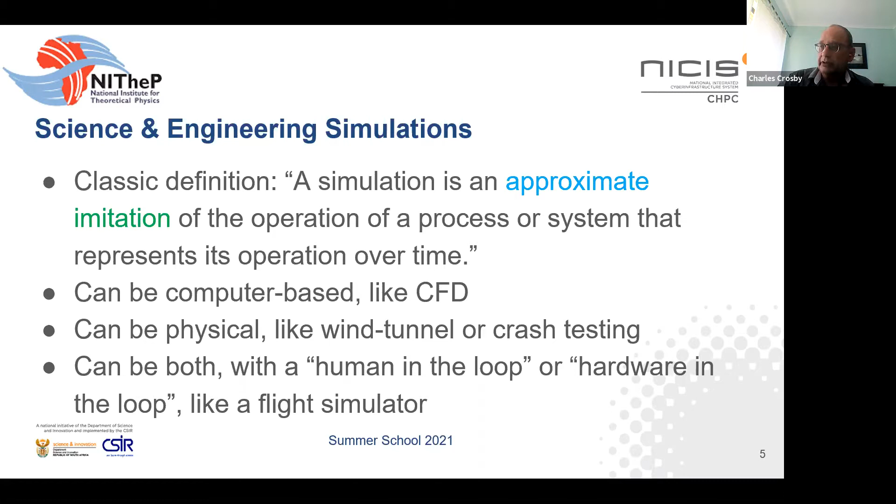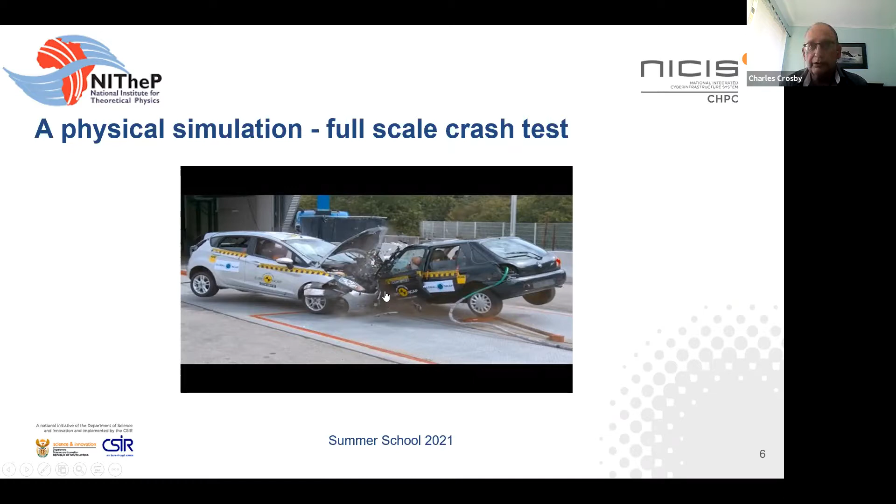To get into one of my favorite kinds of testing, this is a full-scale simulation, full-scale crash testing. As usual, it's a YouTube video, it'll take a moment to load. Well, hopefully it will load. It's quite entertaining to spend some time looking at crash tests on YouTube.

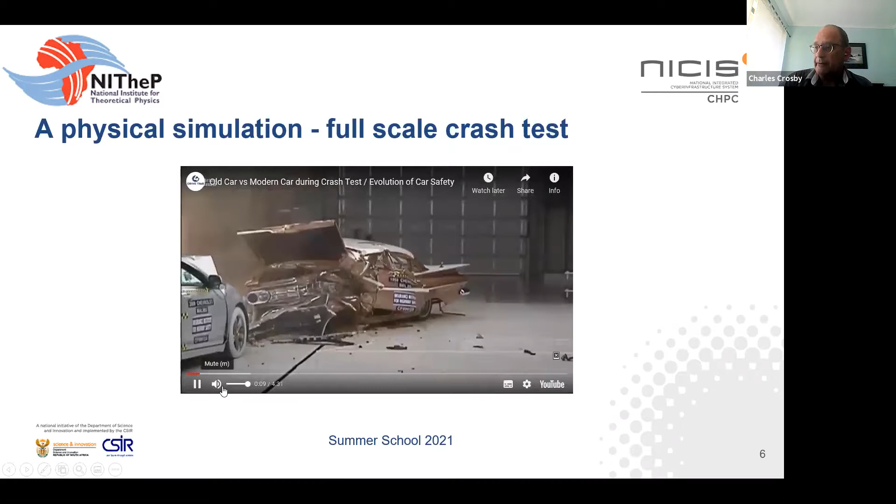If there's something that will teach you to drive carefully, it will be crash testing, because very often these crashes are... if there's something that will draw your attention to road safety, it's crash testing, because these tests are carried out at very low speed, something like 40 kilometers an hour. You almost never drive as slowly as that, but it's spectacular to see how much damage you get.

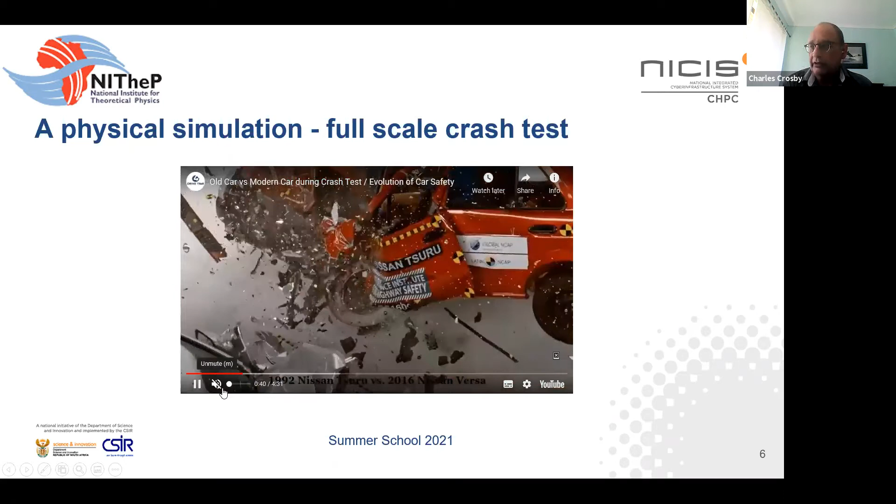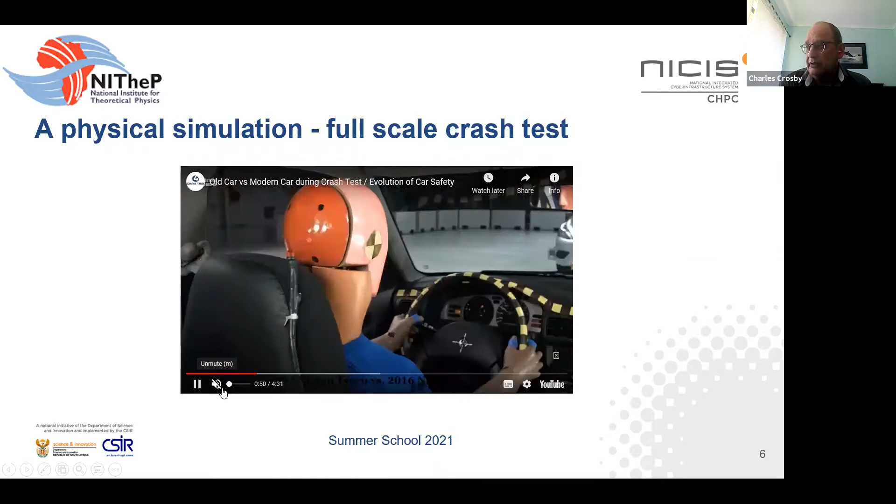Your immediate reaction may be, but this is a real test, they're testing real cars, why are we calling it a simulation? It's a simulation because it's happening in a laboratory under artificial conditions. You're not going to drive in real life at 40 kilometers an hour head on into another car, you're going to have some kind of other accident. But the technologies that help keep cars safe in these kinds of accidents will hopefully help keep cars safe in other accidents, so that's why it becomes a relevant simulation.

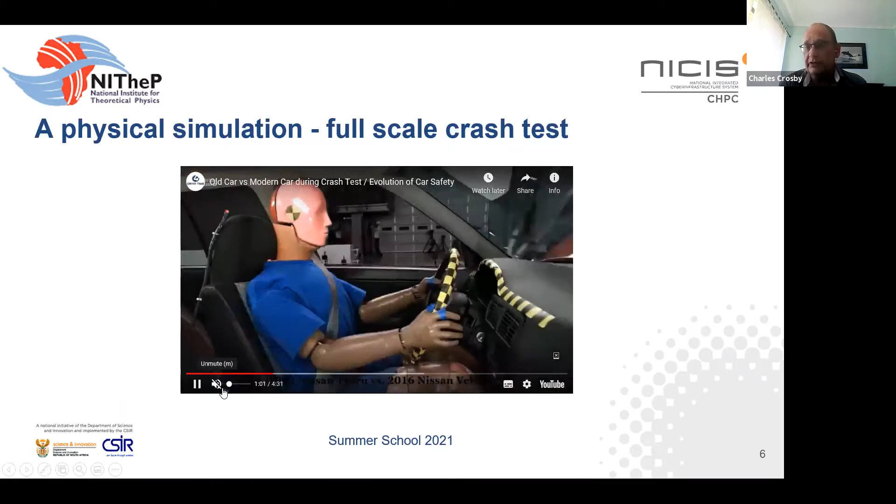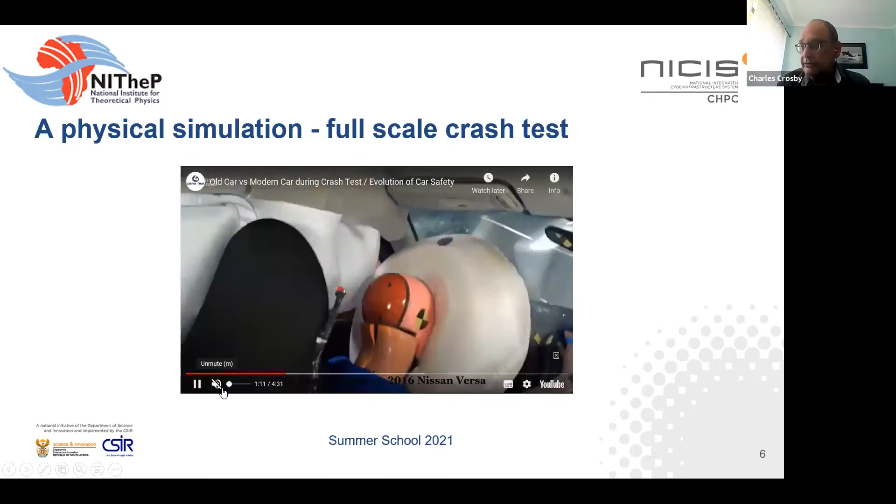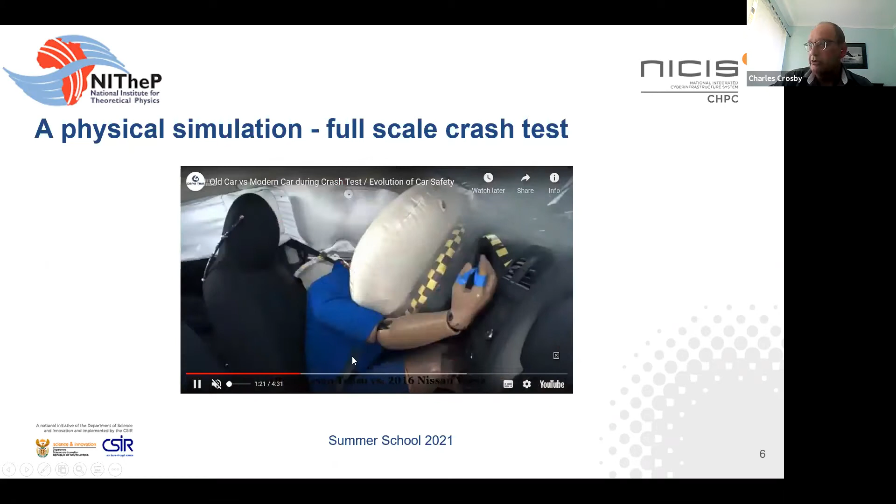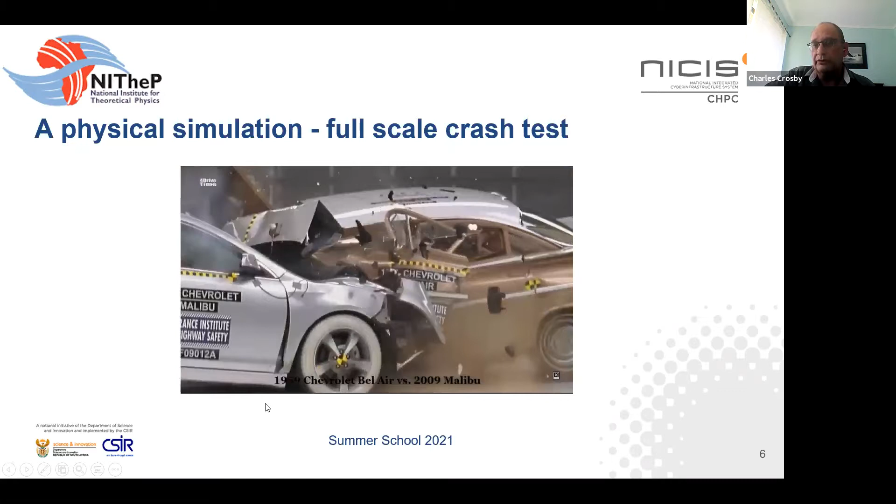It's also a relevant simulation because of the passengers. We haven't quite got around to using prisoners as crash test victims, so we use artificial people as crash test victims, so we can measure what happens to them. And believe me, if you've ever been in a really big car accident, you'll be very grateful for all the work that goes into modern cars. The difference between old cars and modern cars is dramatic, and this is largely due to the simulation involved in developing better and safer cars, ones you're less likely to get injured in. You can spend a lot of time watching this, especially how badly old cars react to accidents, but we'll stop it there.

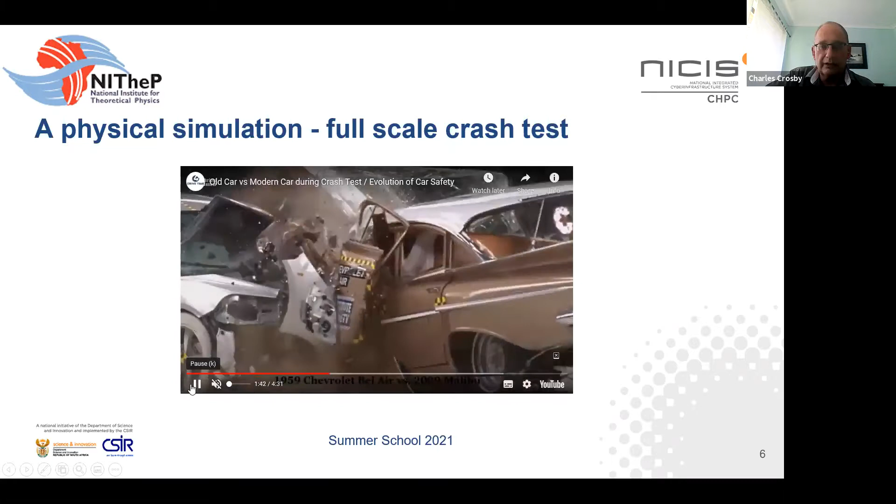Closer to my field of expertise is wind tunnel testing. Now, a normal wind tunnel test is a spectacularly unspectacular event. You've got a model firmly mounted in a wind tunnel, and it doesn't do very much, and the wind blows over it and you measure the forces.

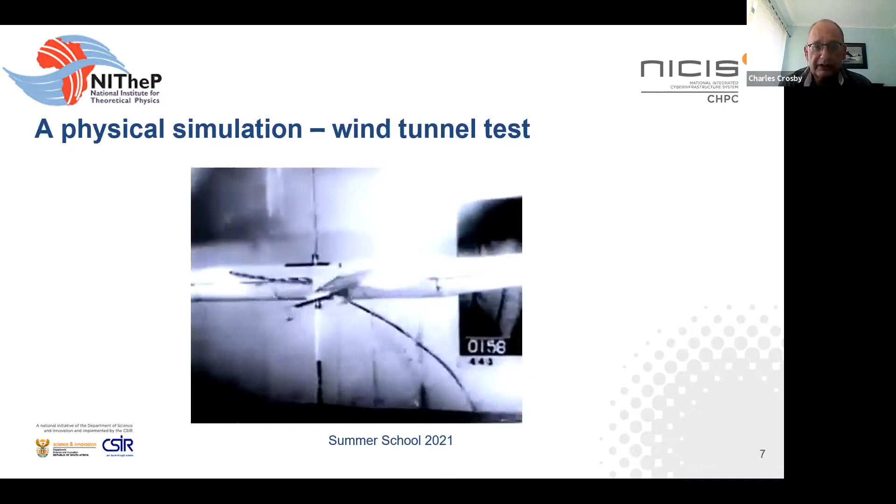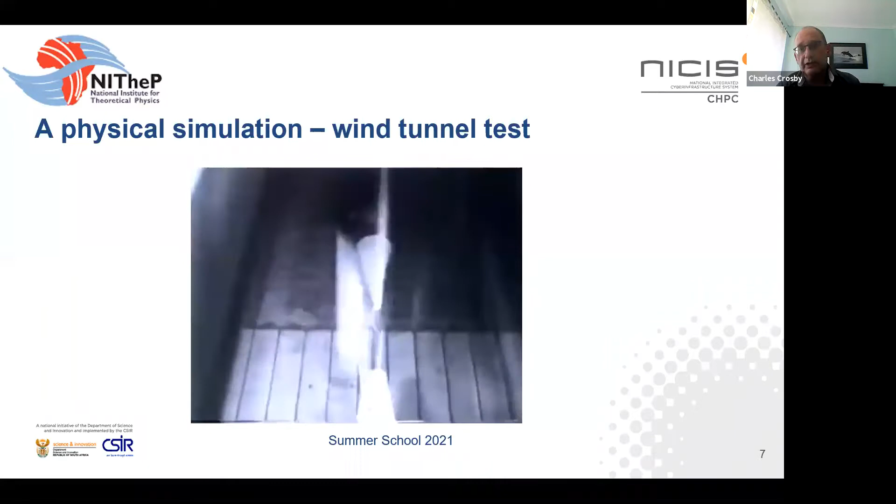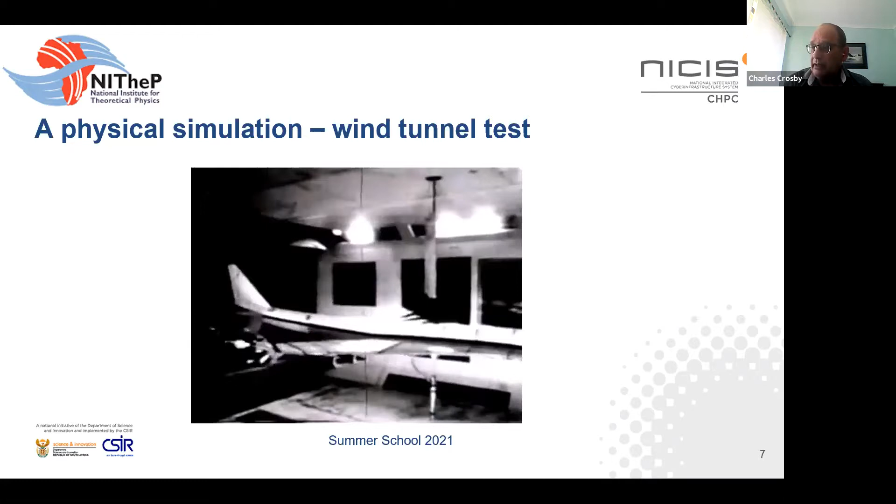Flutter testing does exactly what you don't want wind tunnels to do, which is destroy the model. If this happens in a normal wind tunnel test, you'd be very upset because you really don't want things flying around at 100 meters per second in a confined space. But dynamic testing, such as flutter testing and spin testing and a few other forms, is very valuable in the aerospace industry. Once again, it's important to understand this is a simulation, not the real thing. So when somebody tells you that your numerical simulation results must match the real world, and points you toward an experiment, like a wind tunnel test, that's not the real world either. That's also a simulation, just a different type of simulation.

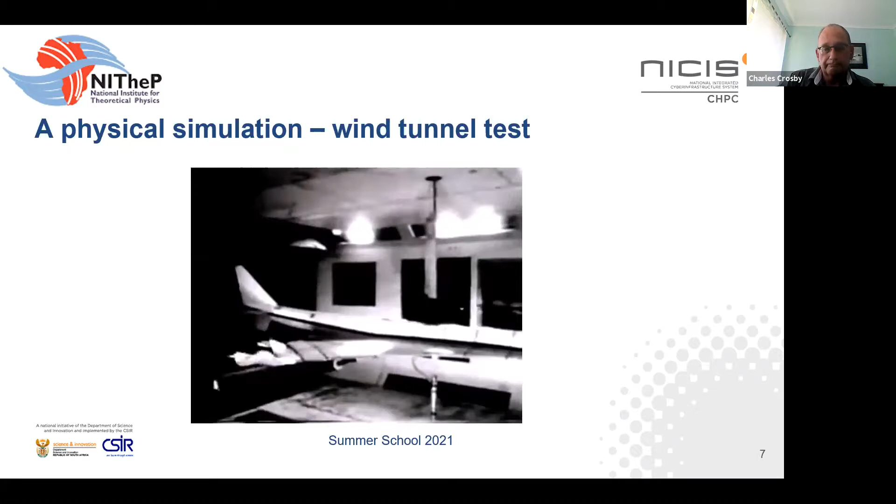Right, hardware in the loop simulation. This is less well known amongst lay people, but if you've ever been involved in the industry, you realize just how incredibly important this is. Before you actually take something out into the field, for example, to take it flying, you want to test it to the best extent that you possibly can.

In a lot of the testing that I've seen, it was actually done with the real hardware. In other words, the control fins on the real hardware had to move as predicted according to the simulation program. So you had all the real hardware involved in this test. The only thing that wasn't quite happening is it wasn't actually flying - it was standing statically on a bench. But this is a critical step, because this is where you eliminate the failures that you would get if you were actually flying it.

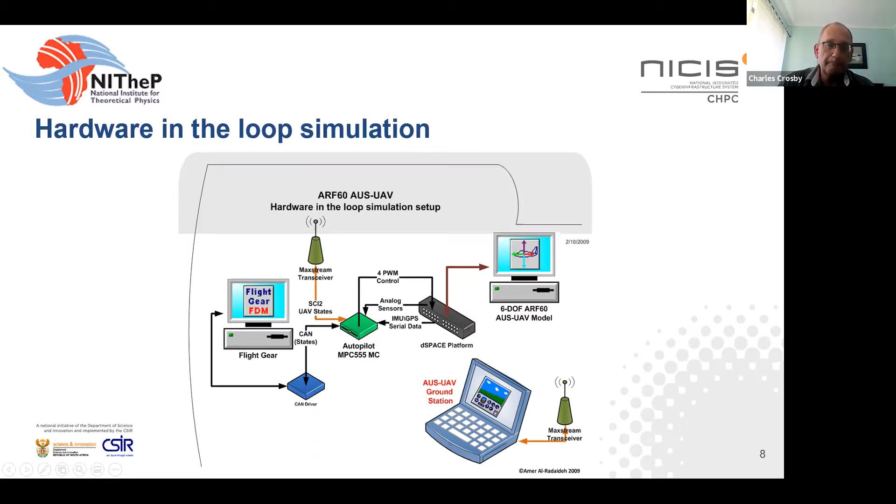Charles, we have a question from the chat now. He wants to know which type of simulation is more reliable, computer or wind tunnel, or lab testing in general, I guess.

So this becomes almost a religious debate, and it rather depends on which angle you come from and which generation of person you are - whether you've grown up with the experimental testing or with the computational testing. In practice, it turns out that it's not a valid question. You don't do things that way. You use both.

So you end up using both of these together, and it comes down to the individuals involved and how you work together, because you gain the value from this technology by using the things together - not by using them in competition to each other. You might choose to do less experimental testing at some stage because you've got better numerical results, so you might skip a complete step. You might choose not to generate a full matrix of output information with a CFD because it's slow - it takes a lot of computing time.

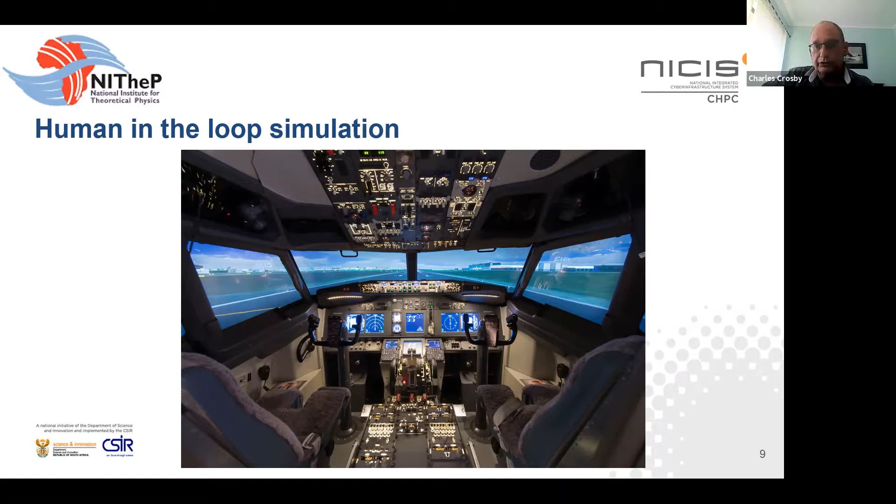Combination of human and hardware. We talked a little about this on the previous slide, but it's also a useful example. Those of you who follow open wheel racing cars will know there was a time when drivers died regularly, and mercifully that doesn't happen anymore. They've made the cars safer and safer until one of the few dangers left was being hit by foreign objects thrown up, for example, by another car having an accident. So that's why you now have structures protecting the driver of these cars, and these structures are getting better, now adding things like a very thick windscreen that'll even stop small debris.

But it's a valid question: how easy is it for somebody to actually drive the car like this? Can they drive it and still see the track under all conditions as well as they need to? So you do this with a simulator. You've got a simulator that does everything the car does, more or less, except go around a track. You stick the driver in, make the modifications, and prove that under different lighting conditions you've got the vision you need.

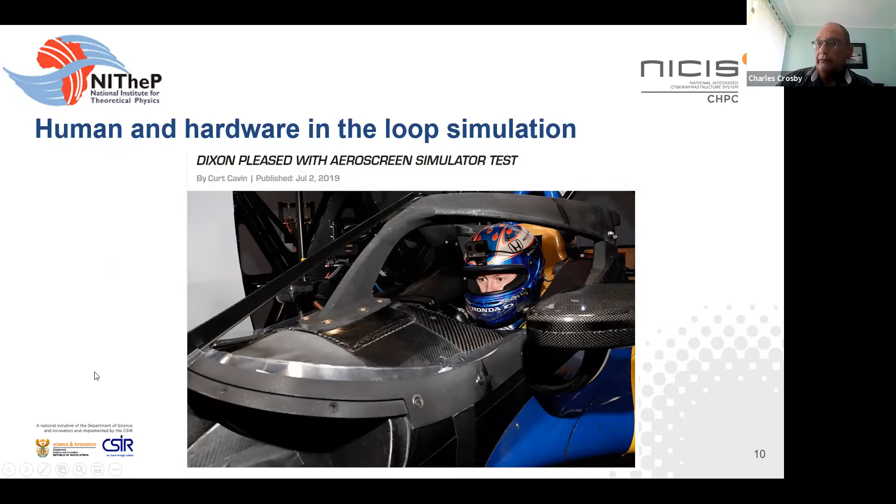If you're working on the basis that what you're trying to get is understanding, the more simulation you do, the better you understand what you're dealing with.

All simulations need appropriate quality control. In CFD, I'm not going to talk too much about quality control in CFD - you can get that from your textbooks. But there are standard methods to ensure that your CFD results are as reliable as they can realistically be.

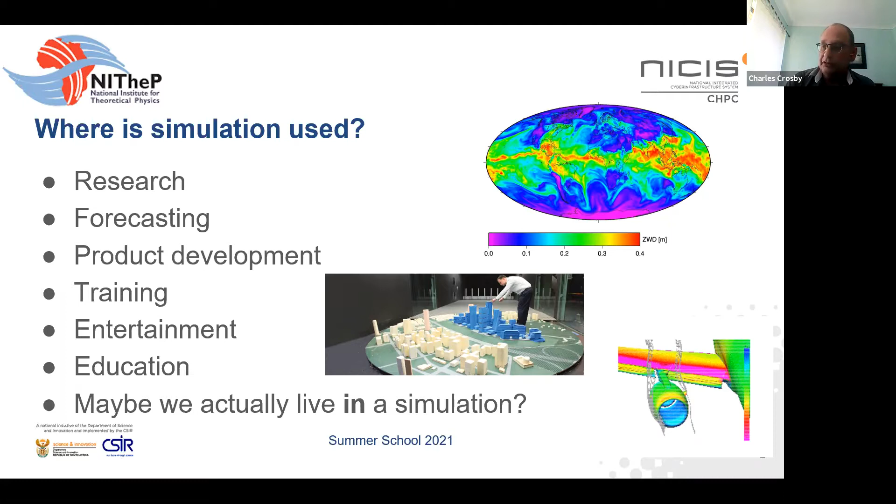Product development turns out to be much, much more difficult and much more expensive than people realize. The reason is that you've got an exponential growth in expenditure during the lifetime of a product development. I had this explained to me at a conference once in a very simplified form, which I think is a simulation of reality - a way of looking at reality without being overwhelmingly complex, but hopefully providing some kind of insights. It's got to do with the fact that as you get further along the process, your costs go up very dramatically, literally exponentially. People use the expression exponentially normally incorrectly - when you start using it correctly, it gets very frightening.

It's quite easy, if you've got a bright idea, to develop a proof of concept prototype - in other words, you've got some clever idea of doing something. My last job before I joined the CHPC was working on equipment to treat ballast water on ships, to prevent them from spreading invasive organisms all over the world. Somebody had a bright idea, built some equipment, and tested it on real life organisms, showing that after treatment those organisms weren't alive anymore. And it was done quite cheaply - it cost a couple of thousand dollars to prove that the idea worked.

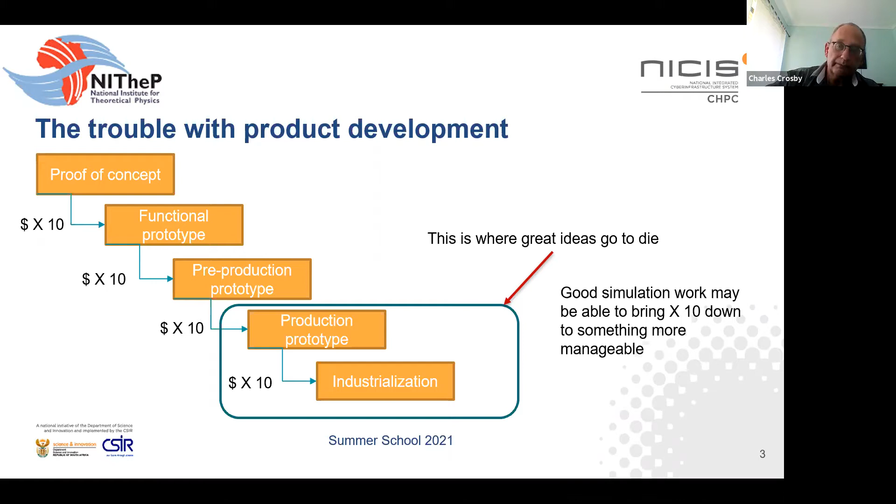Charles, there's a question from Rockefeller. Shoot. Okay, he says this is more of a broad question: how is bias handled when doing simulation, for instance, on product development? I'm not quite sure what he means by that. Maybe he'd better explain to us what kind of bias he's talking about.

Okay, maybe I'll speak it myself. I'm trying to take, for instance, a case where we are testing a product. We are doing some simulation, and we end up neglecting or omitting some cases because we think this is not really important. Let's say, for instance, there are products we develop out there that, when going to production, become biased against women, for instance. That's one case - maybe because at a different phase of the product development, we didn't take into account such consideration because we thought maybe this is just going to work. Now I'm biased towards a certain class, or a certain event, or a certain scenario. That's what I mean by bias. And how do you handle that when doing your simulation? Because to avoid bias, it would be great to test every single case scenario, I believe.

I don't know - so yeah, testing every single case is also expensive. So this is actually, I think we can talk about this a little bit on this next slide, because it addresses some of that. You've got to start broad - I think this is what you're talking about. You want to start your simulation process broad; in other words, explore the design space, all the possible configurations. And you would typically like to do that with cheap techniques.

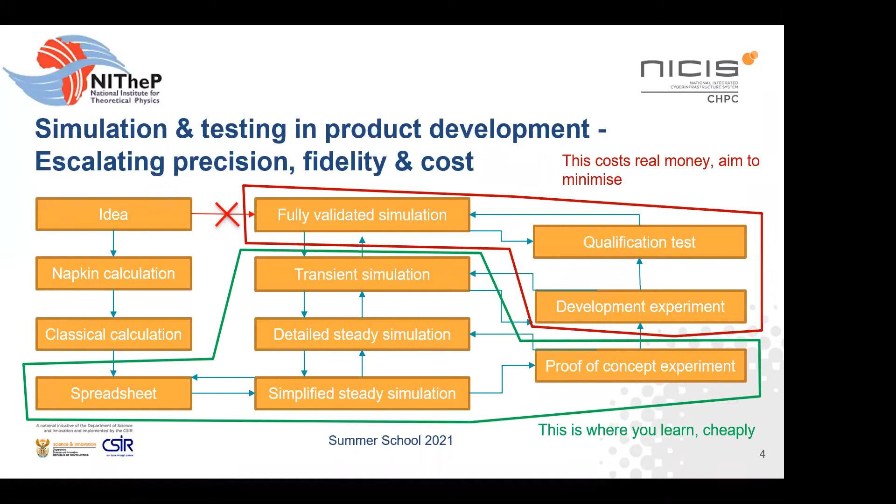Yes, the whole point was about how to narrow down the design space. So you start broad with your approximate techniques, and only experience can tell you the extent to which you can trust your design methods, your approximate methods. They're not going to give you precise numbers, but are they going to give you a correct ranking? Are they going to say product A is better than C, but worse than D, even if the actual numbers aren't quite right?

Very early on, in the company I was working for, when we were just starting to use CFD, we were faced with something like this. We really had to broaden the design space to find a configuration that was practical, because the configuration we had in mind, which could fit into the available space, could not deliver the performance. It was control authority on control surfaces of a flying vehicle. There was only so much space, and the concept the original designers had come up with wasn't working once they tested it.

And we used very, very rough techniques. I cannot believe we got away with testing such rough techniques, but we had to, because this is 20 years ago, so we had very weak desktop workstations and PCs for doing our CFD. There was no parallel processing available, and very little memory. So we made conscious decisions to use very coarse simulation techniques to try and narrow down that design space, knowing that much more detailed analysis and testing was going to come down the line. And it worked. It worked an absolute charm.

It's a very valuable technique, but you've got to understand what you're doing, that you're starting off broad and imprecise, and you're going to narrow it down to something much more precise. Okay, so this slide kind of illustrates that idea.

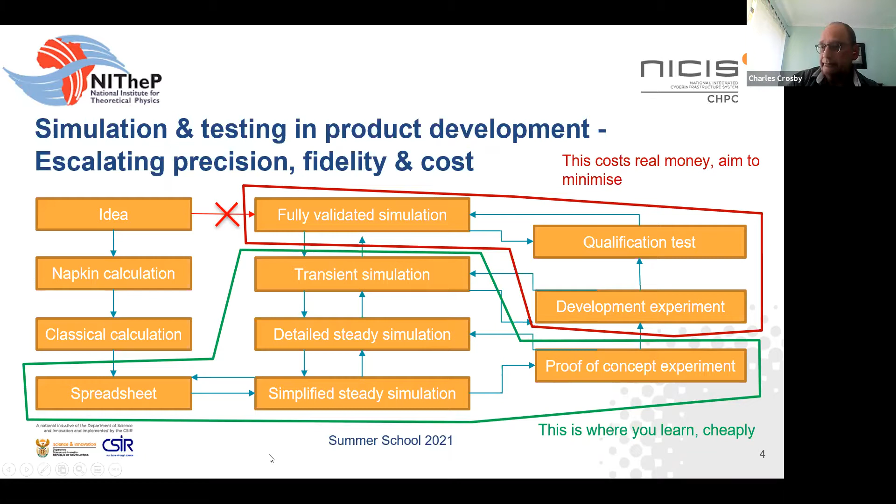A concept that's turned out to be increasingly useful but very, very difficult to implement is something we call simulation-led design. Here's what happens in an old-fashioned company: you've got a design and development team, you come up with a product, you think you've got it right.

You release it for testing. It fails the testing. Then you call in the simulation engineers and ask them why it's failing and how you can change it. Of course, these simulation engineers have been sitting twiddling their thumbs all along, looking on in horror as the design and development process proceeds.

The failure in testing comes as no great surprise, but then you get called in right at the end to try to fix it. I've been in this situation several times — it's immensely frustrating. So the concept of simulation-led design is: before you do any detailed work on the product, you start simulating.

It might be very simple simulations, but you start off with a simulation so that you bring it in at a much earlier stage of the process, right from the start, even before a lot of the other detailed work. The interesting thing is this may not be faster or cheaper, but it can get you a product that's much better, and it can minimize your chances of failure.

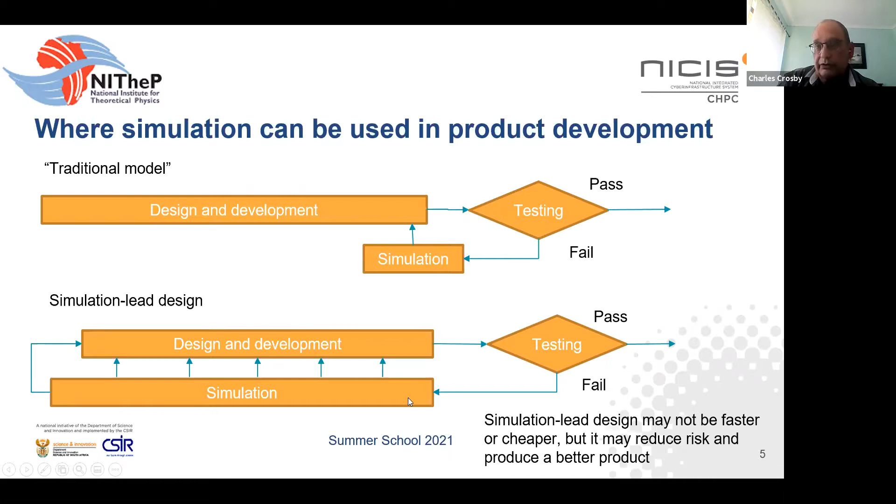It's very, very difficult to get an established company to change from the old approach to this one, because they've developed a certain way of doing it over many years, and for good reason they trust that method. It wasn't too difficult to persuade them to add something to help fix problems, but to change this whole philosophy around is very, very difficult — one of the challenges of this kind of environment today.

To summarize this little lecture: simulation is everywhere. It's used widely in more or less every field of human endeavor. Don't fall into the trap of thinking that everything is about simulation — it's not, there are lots of other things that go into it in anything you're dealing with — but simulation is increasingly important, and people realize this.

You cannot replace your experts who know whatever you're dealing with very well. It doesn't matter if you're designing cars, boats, airplanes, computers, or whatever. Your experts know what they're doing, and if they know what they're doing, they're keen to get additional insights. This is where you come in as a simulation person. You support the experts with good simulation results, and eventually you find they actually fight for you in the company because they realize how much better the simulations are making them look.

This previous slide that I showed, integrating the simulation with other processes, is tricky. It is really difficult, but if you're trying to get anywhere with simulation practice, it is absolutely crucial. Right, so hereby endeth this lesson.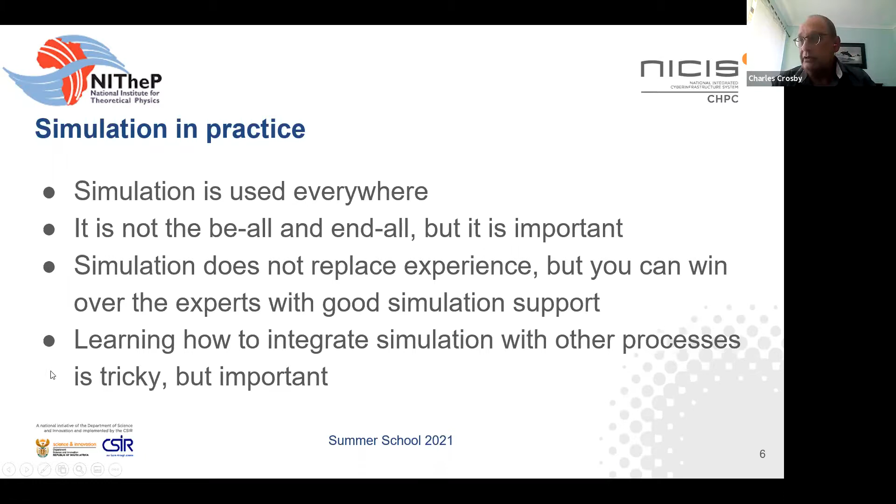Any comments, questions, please? Everybody asleep? Do you want to do a 5-minute comfort break?

So maybe I got a question. Yes, shoot. So logically, I tend to think that sometimes making assumptions about the model or the product you're developing can also help narrowing down the design space. I'd like to know whether from your experience you have encountered cases where making assumptions has revealed not to be a good thing to do.

Yes. You cannot get away from making those assumptions. You don't want to find yourself with an impossible design space. You've got to narrow things down. This is where experience comes in. There's another heuristic: you make all the big mistakes in the first 2 weeks of a new product. So for the next 10 years, you end up making all the small mistakes, but the big mistakes all happen in the first 2 weeks. So you have to question your assumptions at that point.

And this is where, if you've got a process whereby you can get simulation results quickly, early, even if they're not very precise simulations, then you've got a chance of minimizing your chances of making bad assumptions at that point. But of course, you can make really bad assumptions at this point, and it ruins the whole project. But the more you know, the more you can simulate, the more you can simulate quickly initially.

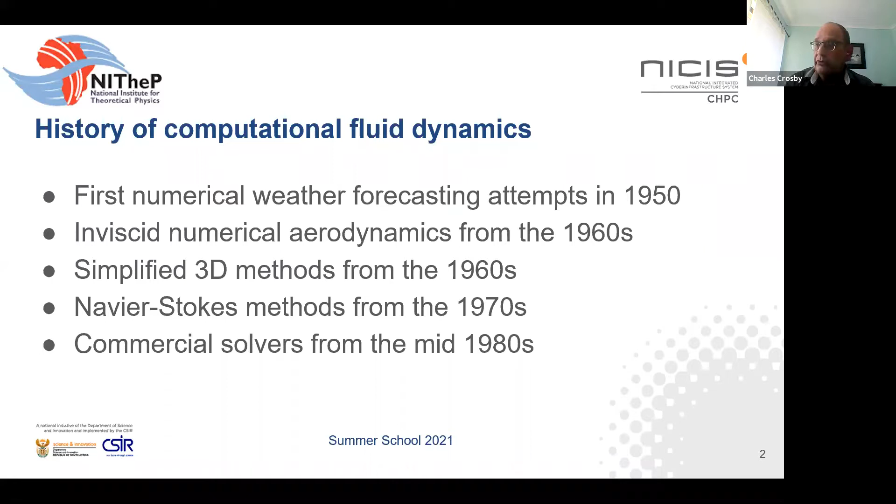That's a very short history of it. So I'm just going to run through different types of simulations.

This is quite a good illustration. We've got an identical situation, just a YouTube video that takes the usual time to load. These are identical simulations: uniform inlet flow, flowing past an obstacle, in this case a cylindrical obstacle.

You can either do it steady, which means you drop the time-dependent terms from the equations, or you can do a transient simulation, which means you take into account the unsteady effects.

And what you see is something completely different. Superficially on the upwind side things look more or less the same, but in practice you get this oscillating flow. This is something that should be familiar to everybody.

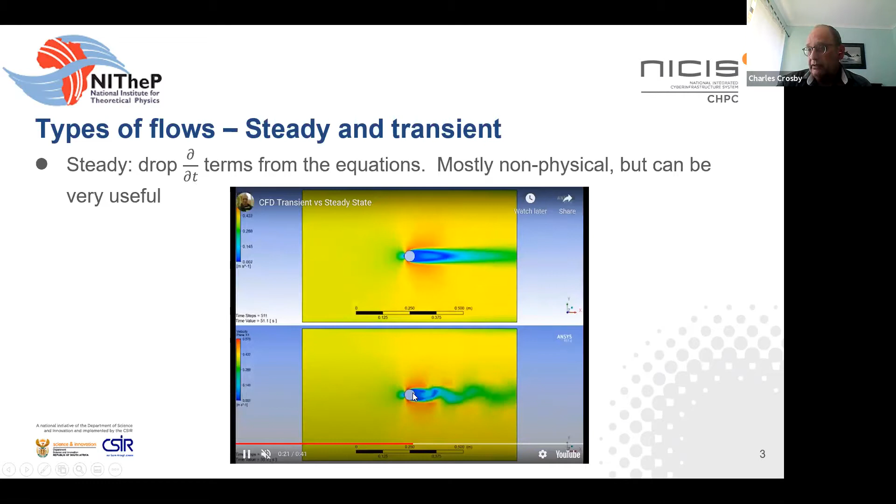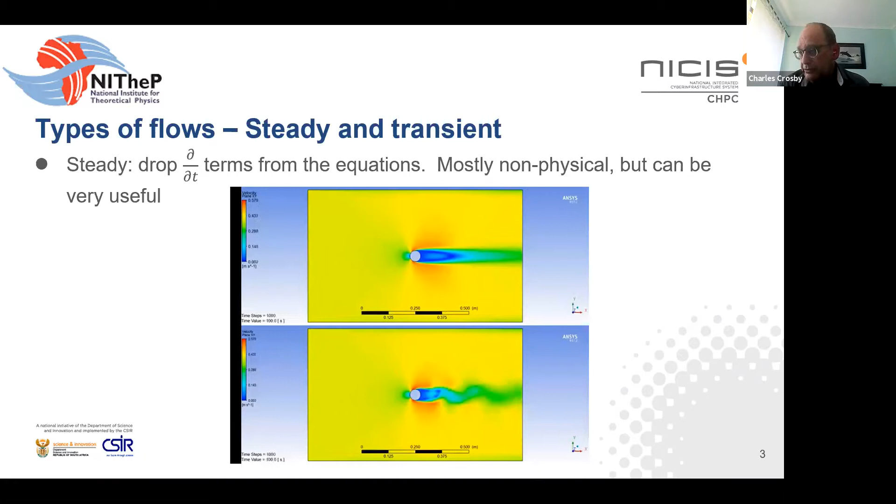You get this more or less anytime you stick a cylindrical object in flow. You get a humming noise, a vibration. Industrial chimneys have helical protrusions fitted around them to break up those vortices in 3 dimensions. A lot of radio aerials on cars have a piece of wire sticking out from the roof with a spiral wound thread or something around it, which does the same thing. There are lots of places where you find this unsteady shedding of a wake.

It's awkward because it's noisy and it induces vibrations, but it's very much a real effect. And if you didn't do transient simulations, you wouldn't expect it.

So this is the next one. We can distinguish between compressible and incompressible flows. We've got two identical situations run on the same computer software, with the same computational mesh, with the same fluid, but they're running at different Mach numbers, essentially different speeds.

In this case, your onset flow, the one on the left, is at about 80% of the speed of sound, Mach 0.8. And in this one, it's at a very low Mach number, around Mach 0.15.

What we're plotting is the dimensionless pressure coefficient. In other words, we remove the dependency of speed from the pressure so that we can look at the pressure coefficient, a dimensionless number. And we see that the two solutions don't look at all similar.

The pressure is much lower over the upper surface in this so-called transonic case. Then there's a very abrupt transition to a higher pressure, a so-called shock wave. Depending on how resolved you make your model, that can be a very, very sharp discontinuity in the pressure.

So the difference here was purely the compressibility. This flow is compressible, that flow is not. It does not take into account the compressibility of the fluid, so it doesn't make shock waves, and it also produces less of a low pressure area.

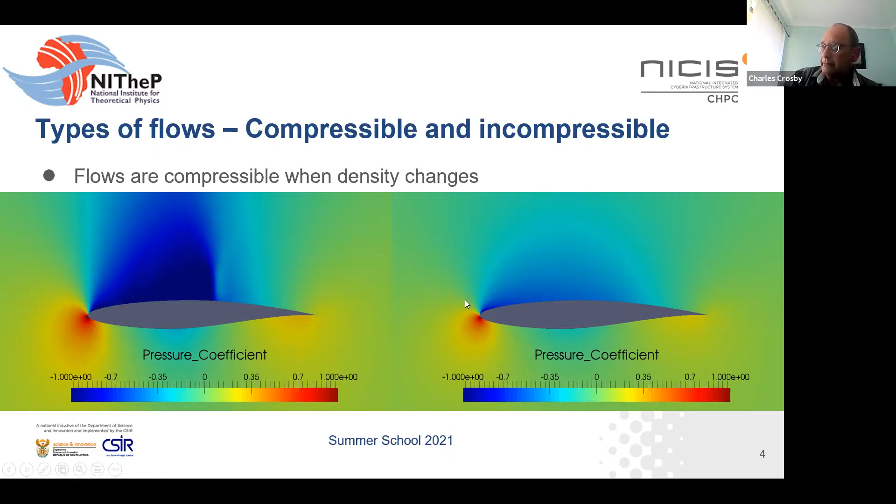Charles? Yes. Luciano asks if you should always do steady simulations first before doing transient, or if that's not necessary.

Nearly always. But the reason for doing this is, remember I said you move from simple to complicated. You don't go the other way. It's much, much more demanding to do transient simulations than to do steady simulations.

There's a temptation, and you find it actually in some of the older CFD literature, that you should do everything with transient equations. And if it's a steady situation in real life, it will converge to the steady state solution after some time. The problem is that some time is a very, very long time.

The difference between doing that and basically making the equation steady by removing the time dependence to start with could be 10 times, 50 times faster. It's an enormous difference. So if you're doing your initial rough estimates, you will be doing steady analysis.

Now some things are inherently transient, things that move. For example, you cannot do any form of steady simulation of the flow inside an internal combustion engine in a car. Steady flow is just not defined there, it's not relevant because everything is changing all the time. So you can't do that there, but wherever you can, you will do steady simulations first.

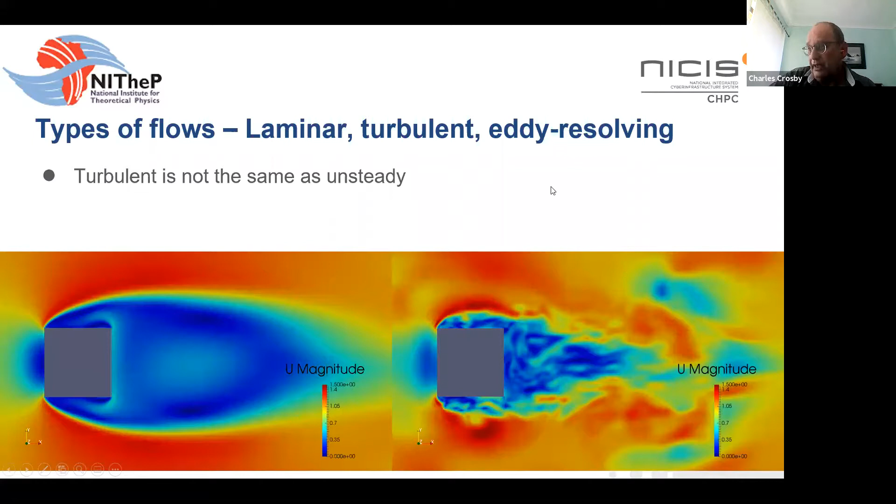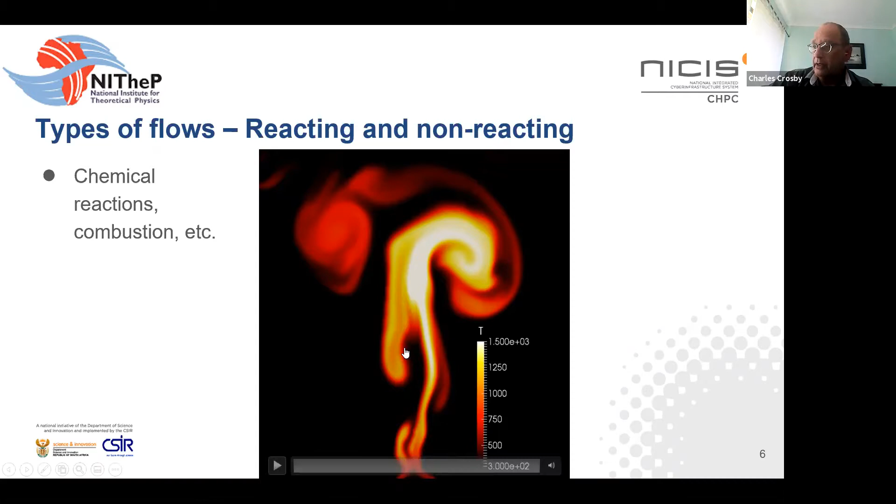So this is just a tutorial case, a very simple one, from a very interesting open source CFD program. Andrew, help me, I've forgotten the name, the fire one. FDS, Fire Dynamics Simulator. It's formulated exactly to model fires. It's so involved to model the chemical reactions and combustion, and the resulting turbulent and convective flow from that, that it's worthwhile to use a special program just for this. FDS is quite a remarkable piece of software, and another very good open source one.

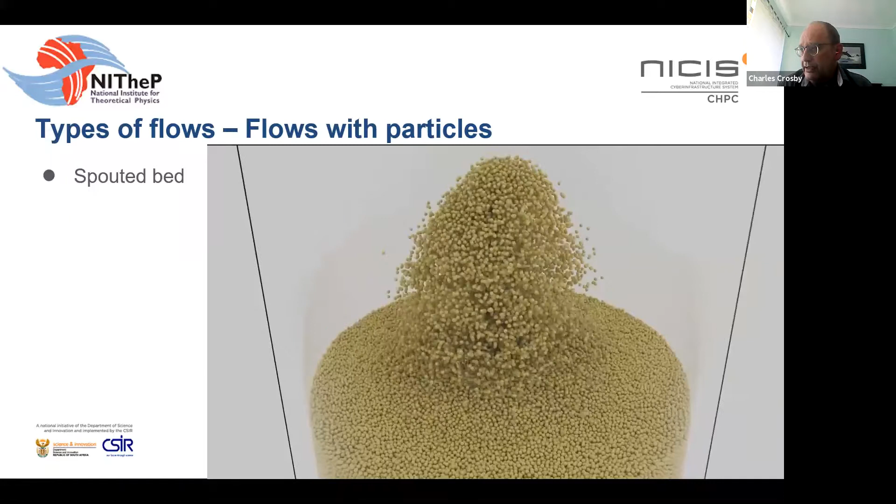This comes from another one of our favorite open source software products, called MFIX. It's a multi-phase flow with interphase exchange simulation program, specifically developed for the simulation of multi-phase flows. So what's modeled in this video is a so-called spouted bed, where you've got a container full of particles and you're blowing a jet of fluid through those particles. There are different types, but this is the spouted bed version, where it makes a bit of a jet which mixes up the particles and brings them into contact with the fluid.

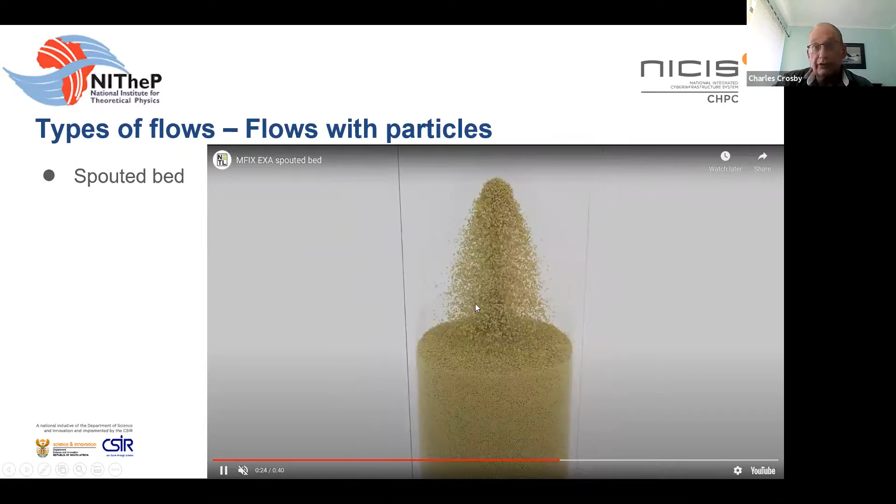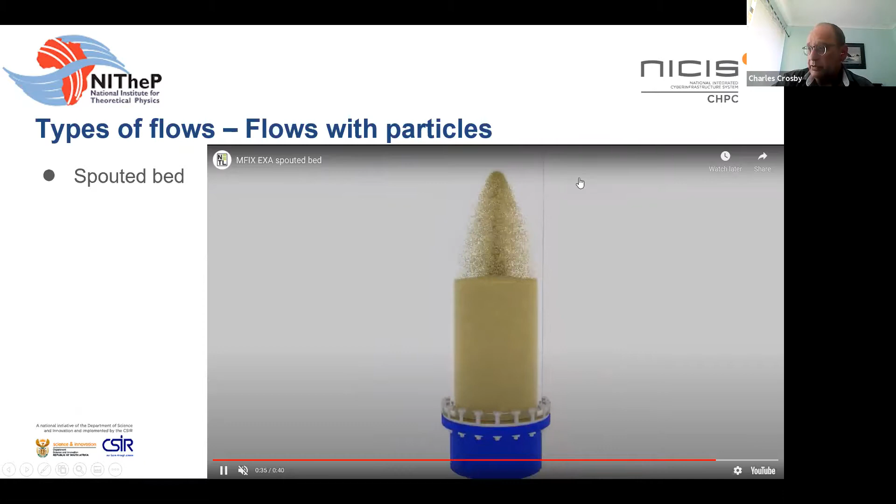So there's a lot going on here - fluid dynamics and particle dynamics. This kind of thing is enormously demanding to simulate, but fortunately these days with parallel computers it's possible to do them. So it's a subset, if you will, of computational fluid dynamics, but it also includes the solids.

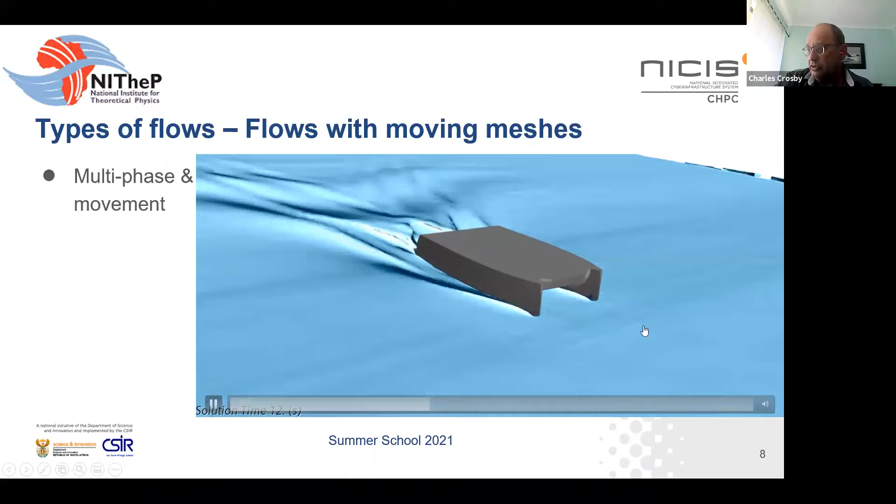This is a double-hulled boat subjected to waves in the ocean. Once again, there's a lot going on here - aerodynamics above the water surface on the superstructure, and all sorts of hydrodynamics underneath. At the interfaces of these two you get the waves forming - waves due to the motion of the boat through the water that makes its own wave system, but it's also being subjected to the waves on the surface of the water. So this is essentially an example of a CFD solution with moving meshes, because you need to simulate the motion of the bodies.

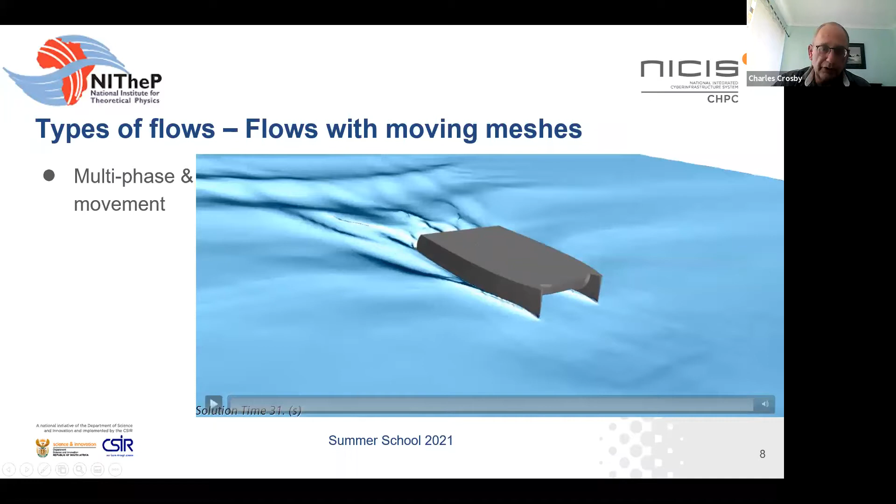I think we've had this question: how good is good enough? And the answer is fit for purpose - what are you trying to do with the answers? If you're dealing with human life, your purpose is very strict and you need very high precision, meaning you've got to take more time and do a lot more experimentation and testing to make certain your answers are reliable. But sometimes you need faster answers and they don't need to be so accurate. So you cannot let perfect be the enemy of good enough - you don't have to do a perfect simulation for it to be useful.

So in narrowing down your design space, you've got your design methods, based on fast, easy methods for ranking design options. You've got your research methods, where you're trying to understand the physics - this may take you to very high precision, and you may not use all the high precision results, but you're trying to understand some fundamental physical phenomena. And then you've got your qualification methods - can you rely on these answers? That's the kind of thing you get, especially in the nuclear industry.

Just to summarize today's lecture: CFD, Computational Fluid Dynamics, is a very broad concept. There are a lot of different types of physics you can model, and different methods you can use to approach it. It's very important to remember that simulation work has different purposes, and together with that, different levels of desired precision. I think we'll call it a day at this point.